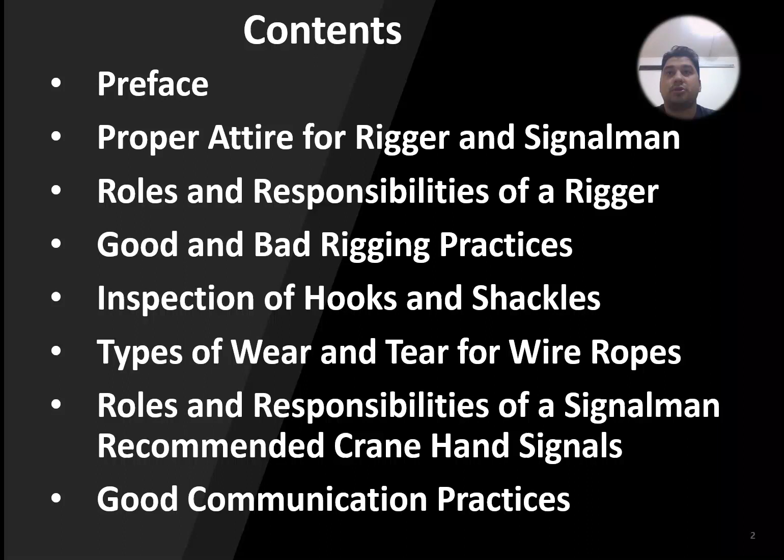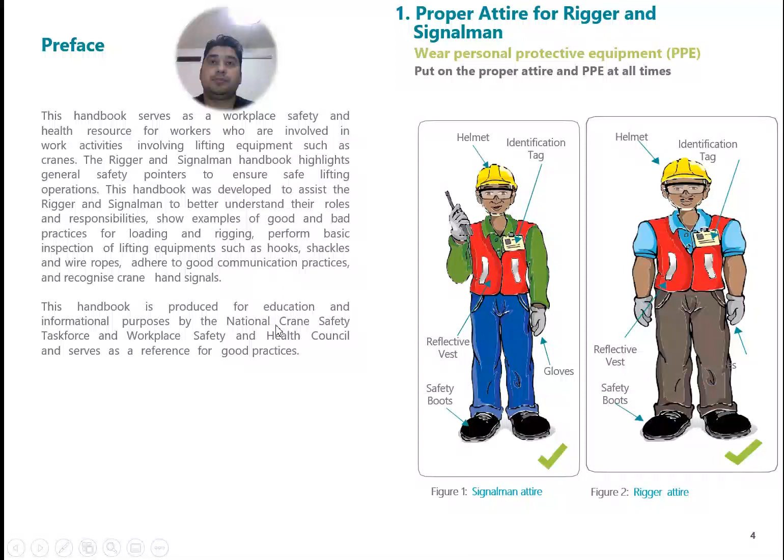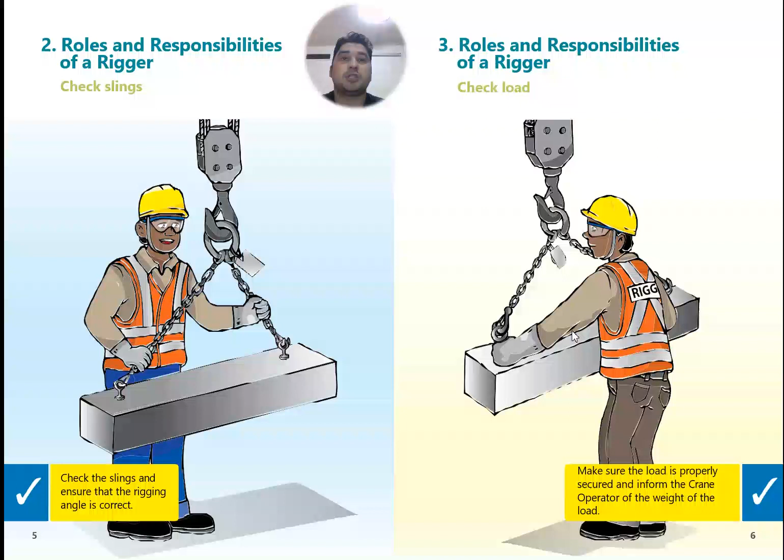After that, we have roles and responsibility of a rigger. A rigger should check the slings and ensure that the rigging angle is correct. After that, check the load - they have to check the load of this rigging, make sure the load is properly secured, and inform the crane operator of the weight of the load. They should check that it is properly secured and properly managed.

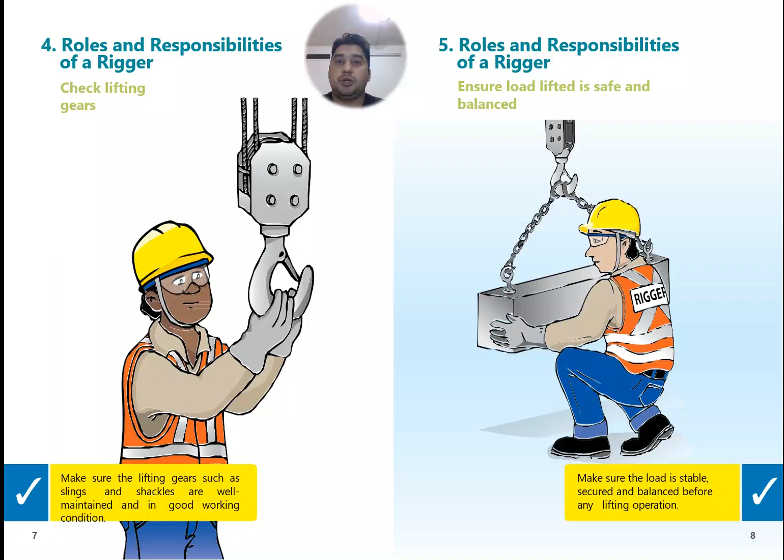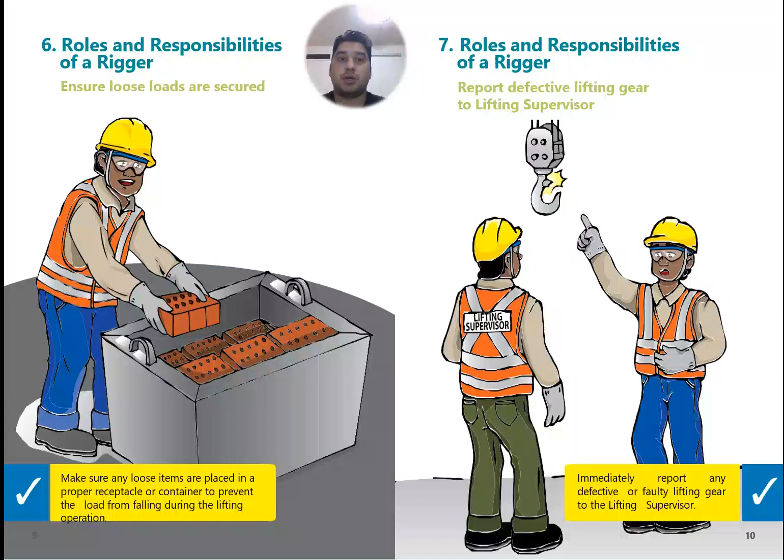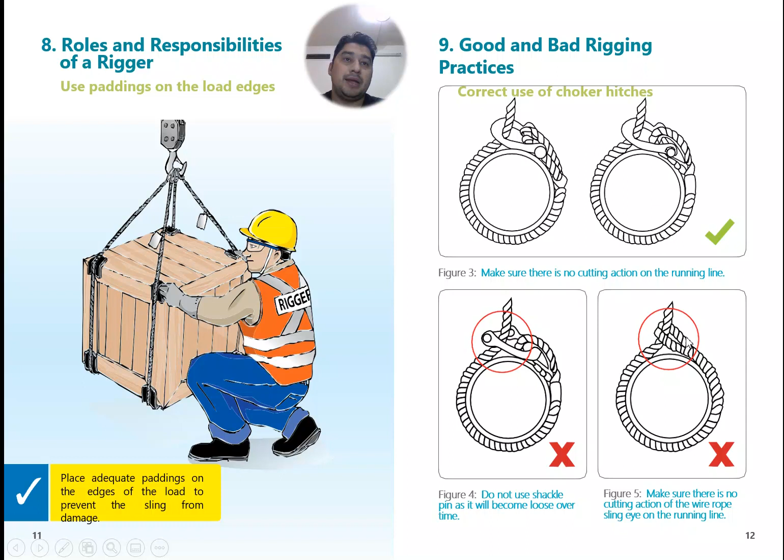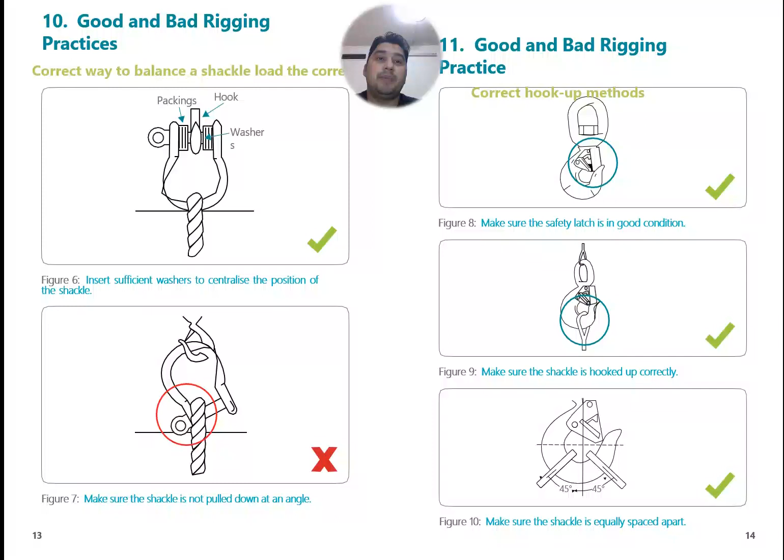Good and bad rigging practices. After that, we have the correct hookup methods. This is the correct hookup method. Make sure the safety latch is in good condition. Make sure the shackle is hooked up correctly. And after that, make sure the shackle is equally spaced apart.

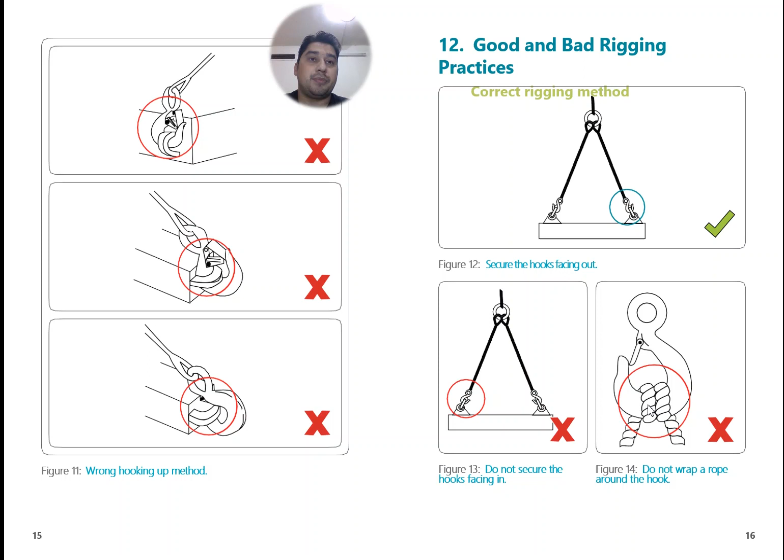After that, do not secure the hooks facing in. They should not face in, they should always face out. Do not wrap a rope around the hook. We should not do this whenever we are doing any lifting process. We have to make sure that we are not wrapping a rope around the hook.

Correct rigging method, this is the correct rigging method. Make sure the load is rigged correctly before lifting. We have to make sure that the load is properly placed and properly rigged before the lifting operation. The load will tilt to one side during lifting if it is not rigged correctly. We have to make sure that it should be rigged correctly.

Now the load length is too much, so what will happen during the lifting operation? This load will not be stable. Sometimes it will go this side, sometimes it will go right and left, so it won't be stable. We have to make sure that we are rigging the correct process.

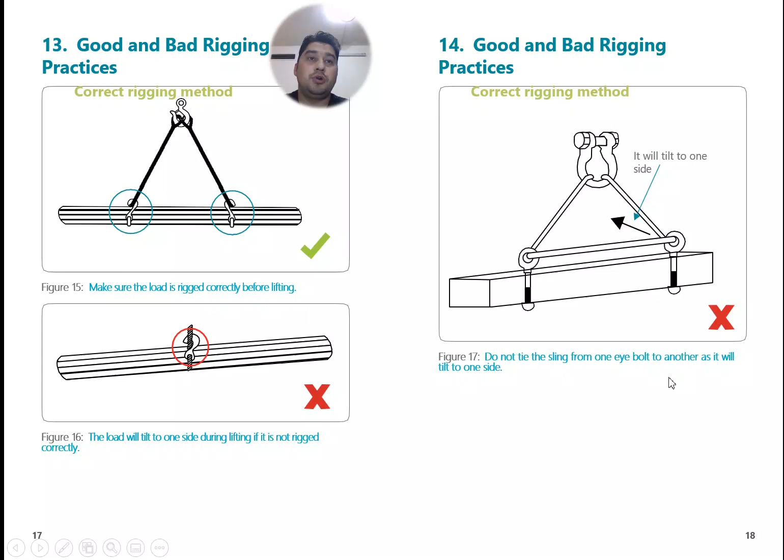Good and bad rigging practice. Correct rigging method, this is the correct rigging method. It will tilt to one side if we lift it in this way. On this side you can see the length is less and this side is high, so it should be balanced and equal, so it will not go from one side to another. Do not tie the sling from one eye bolt to another, as it will tilt to one side.

Hook up unused slings. Make sure any unused slings are hooked up properly. After that, do not leave unused slings unhooked. If they are not in use, they should not be left unhooked.

Good and bad loading practices. Correct loading method, this is the correct load method. The correct loading method should be like this. The eye bolt will bend if loading is not done correctly, so we have to make sure that loading is done in a correct way so the eye bolt will not be damaged.

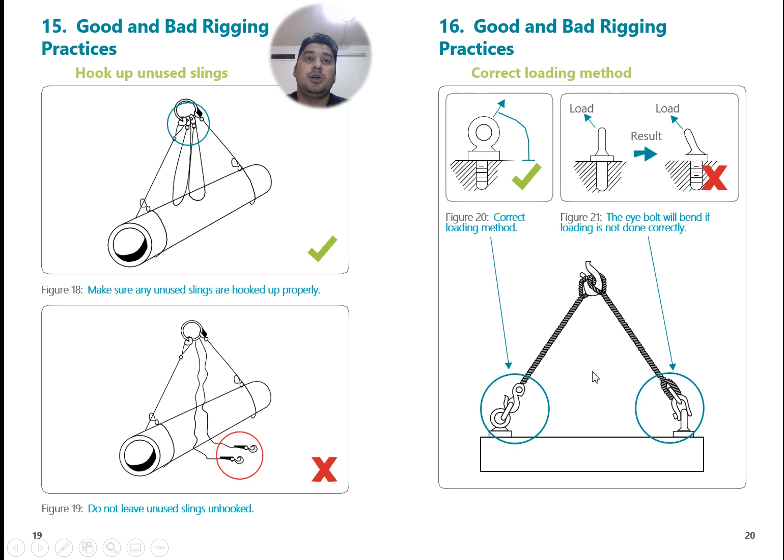Use padding during lifting. Whenever you are doing any lifting process, you have to use padding to avoid any damage. This is the correct way of using the padding to prevent damage to the sling. You have to use it in this way. With no padding, the sling will be damaged if padding is not used on the load, and the load can become unstable or fall down.

Then the correct method of joining sling eyes and shackles. These are the sling eyes and there is the shackle. This is the correct way of joining shackles and sling eyes. Now, the wrong method of joining the sling eyes - these are the wrong method, this is the correct method. So we have to use it in this way, we should not use it in that way.

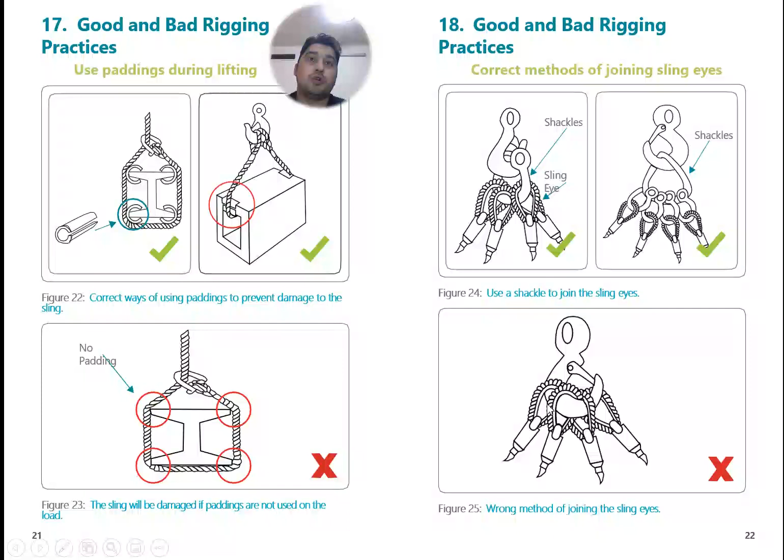Use the original screw pin. Whenever you are using this line, you have to make sure that you are using the original screw pin. Use the original screw pin for the shackle whenever you are using any shackle for the rigging.

This is the bolt. This should not be used. Do not use the bolt as a screw pin. It will bend.

Use tagline to control movement of the load. Whenever you are doing any rigging or lifting operation, you have to use the tagline to control the movement of the load to avoid any unplanned or unwanted movement.

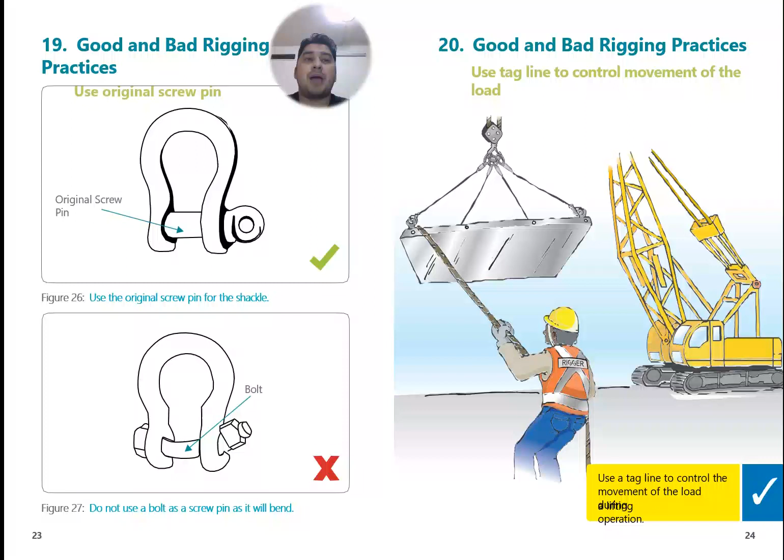Correct method of unloading, shoring planks. This is the correct method of unloading any load. Place the load on shoring planks during the unloading. After that, do not use the crane to pull out the slings from under the load. So do not pull the crane.

Check the hooks for any defects and make sure they are in good working condition whenever you are doing any inspection of hooks and shackles. In this way, you have to do the inspection of hooks and shackles. You have to check for cracks and twisting.

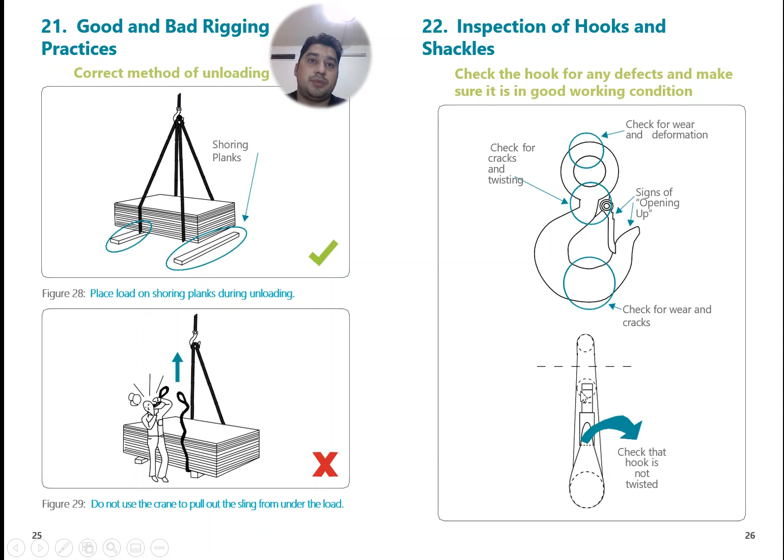Check for wear and deformation and signs of opening up. Here you have to check, and check for wear and cracks, and check that the hook is not twisted. So these are the inspections you have to do on hooks and shackles.

Check the shackle for any defects and make sure it is in good working condition. You have to check the shackle, it should be in good working condition. You have to check for wear, cracks, bending, and twisting. The pin should always be seated, the pin should be there always.

Check wear and straightness and check the opening width. You have to check the opening width, the width should not be too much. You have to make sure that the width is in the accurate form.

Types of wear and tear for wire ropes. Check wire ropes for any defects and make sure they are in good working condition. You have to check the wire ropes also. If they are crushed severely like this, they should not be used. If they are flattened severely, they should not be used also.

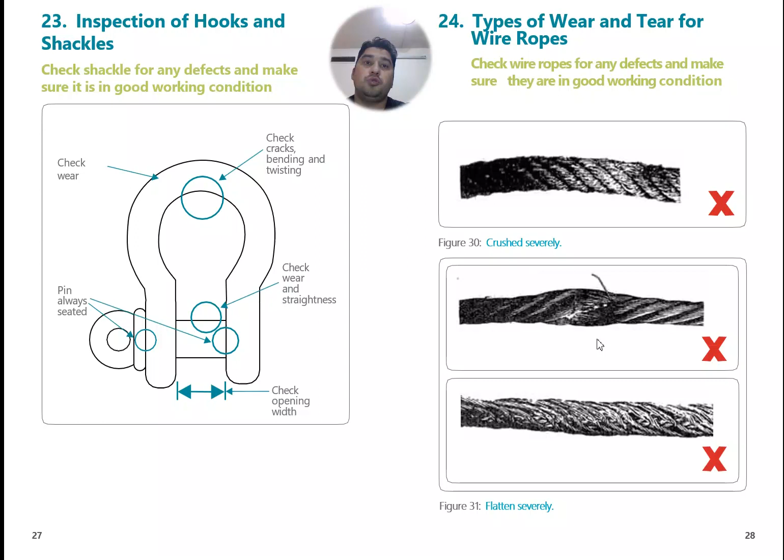Check wire ropes for any defects and make sure they are in good working condition. If they are bird caged like this, they should not be used. If they are bent, dog leg kink should not be used, and also kink, open kink, and close kink.

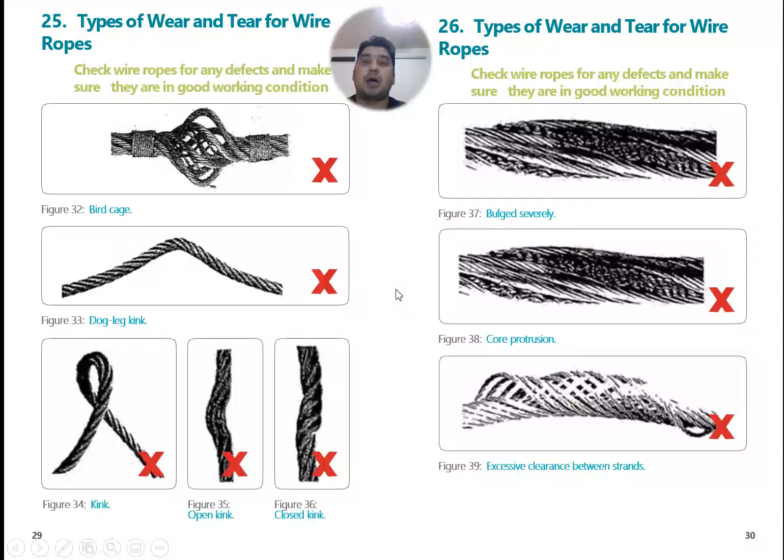Roles and responsibilities of a signalman. Before we talk about the roles and responsibilities of a rigger, now we will discuss the roles and responsibilities of a signalman. The signalman should check that the load is properly rigged.

Check that the load is properly rigged before giving a clear signal to the crane operator. That is the responsibility of a signalman.

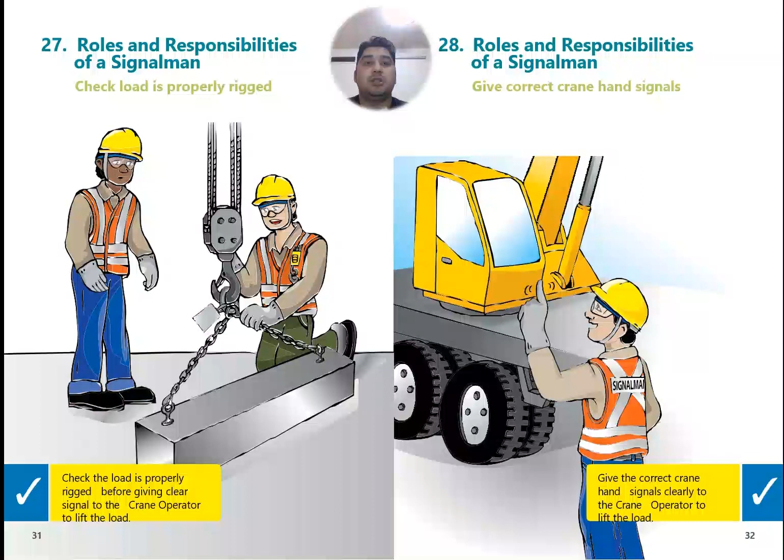Give correct crane hand signals. A signalman should give the correct hand signals to the operator. Understand and practice correct crane hand signals. So these are the correct crane hand signals that should be given by a signalman.

Jib up, this is one. Jib down, travel to me, travel from me - signal with both hands.

Clench and unclench fingers to signal take the strain. Hoist, lower, slew left, slew right, arm extended, pointing with finger in the direction of swing of boom.

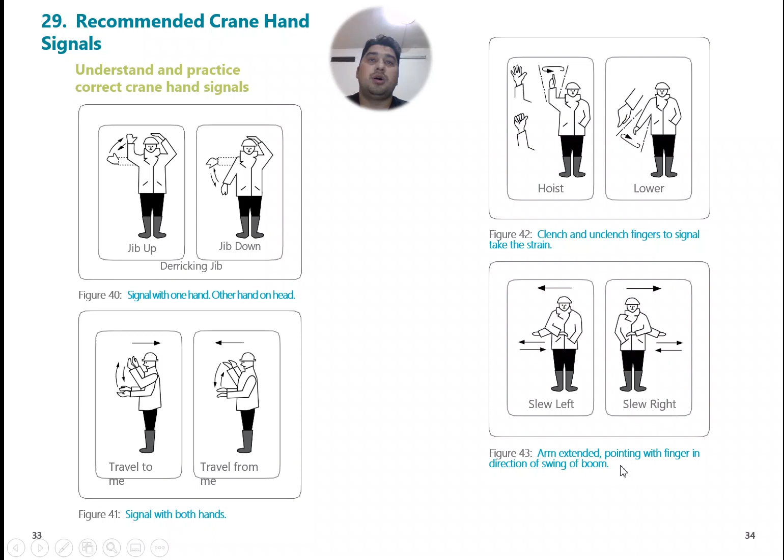Signal with one hand, other hand on head. So these are the different signals that a signal person should give to the crane operator.

Good communication practices. Now practice good communication within the lifting team. Communication between the lifting supervisor, rigger, and signalman must be maintained at all times to make sure that the lifting plan is operated properly and the lifting process is completed without any injury, accident, or incident.

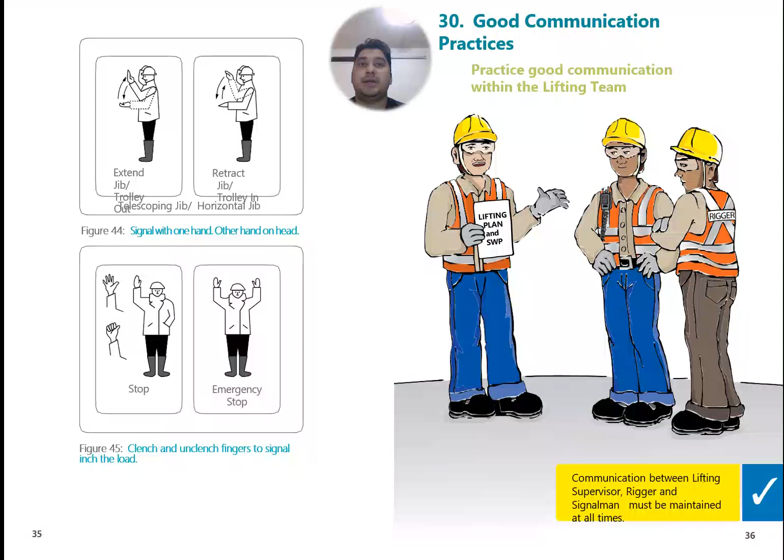Practice good communication within the lifting team. The rigger and signalman must maintain good communication between each other at all times. So these are all the responsibilities of a signalman, and there should be proper communication within the lifting team.